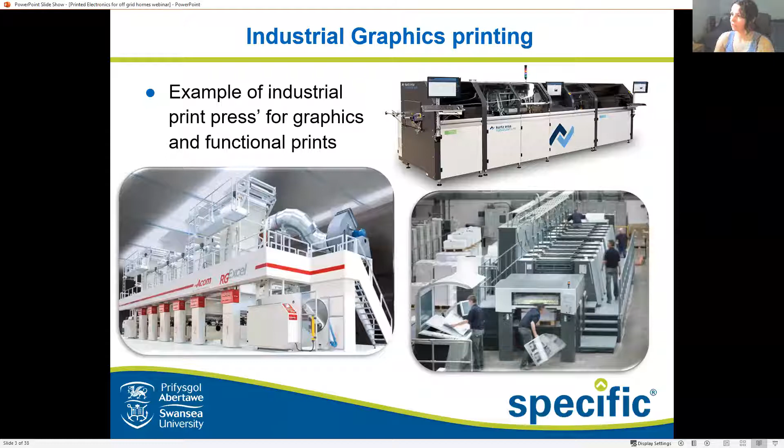What gets me excited is taking these capabilities to mass manufacture things at a very high rate onto flexible substrates and enabling it to have more complex properties. This is made possible because an ink is made up of four main components. This is the resin, which will combine with your solvent, whether it be alcohol-based, water-based, whatever it is. And then if you have a few additives together and you mix this with either your pigments or your other materials, you create an ink.

If you want a functional ink, you can add things such as conductive materials like silver, copper, carbon, or if you want it to change colors, you can add other things. This enables us to create a wide range of functional materials. And these come in a very wide range of viscosity. When I refer to viscosity, I'm talking about the thickness of the fluid, so how hard it is to shear.

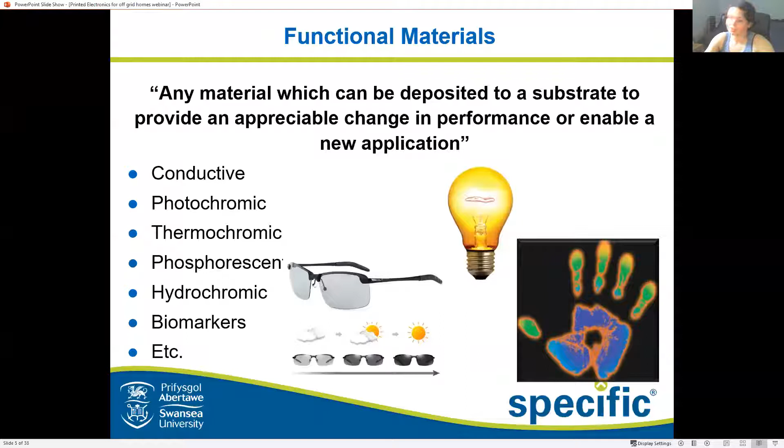So functional materials. Not only is there conductive, which I mentioned earlier, we've also got things like photochromics, which change color in light, thermochromics, which change color with heat, phosphorescence to glow in the dark, hydrochromics, which you might want on some waterproof clothing or on a waterproof screen in your car, biomarkers, which are essential for biosensors, especially ones like diabetes tests, which are actually printed, and many other things.

So this is where you guys who are listening live can get involved. We have a series of different images on the screen. Can anybody tell me which of these can be printed? If you can unmute yourself, please do, and just quickly shout out what can be printed out of this lot. Printed circuit boards. Yes, those can be printed. What else? Custom prosthetics. Yes, perfect. Those are most certainly printed. Anyone else want to hazard a guess? One more. Anyone? No, that's more than fine.

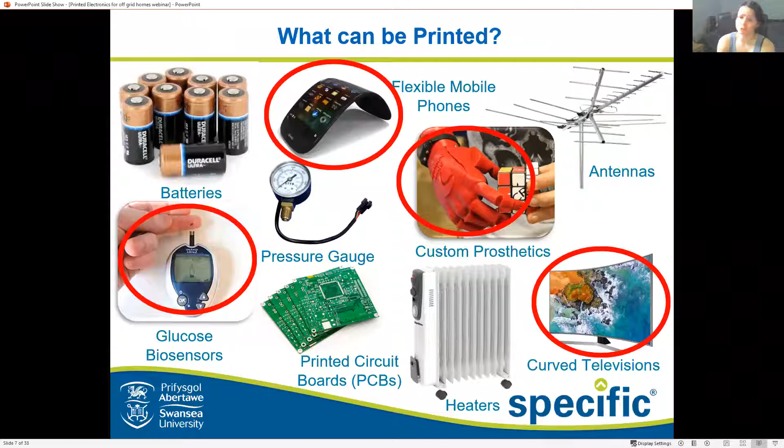Okay. So straight off the top, these four things can be printed exactly how they are. Glucose monitoring biosensors, those are actually screen printed, which we'll go over later. Flexible mobile phones, these are made of OLEDs. These are most certainly printed. Custom prosthetics, those can be printed using 3D printing techniques. And also curved televisions, those are also OLED. However, it was a trick question. All of them can be printed.

In the case of batteries, those can also be screen printed to make them flexible, thin, and easier to use. Those are currently being developed. Antennas can also be printed, such as radio frequency ID tags, which if you have some clothing from places like Decathlon, if you have a look at your tag, you will be able to see that they have that embedded in them. And therefore, they can be printed.

Heaters, this one might have been given away earlier when I was chatting to you guys. Those can also be printed, and I will show you a demonstration of one later. And pressure sensors, those can also be printed. So all of these things have the ability to be printed, mass manufactured, and made thin and flexible where needed.

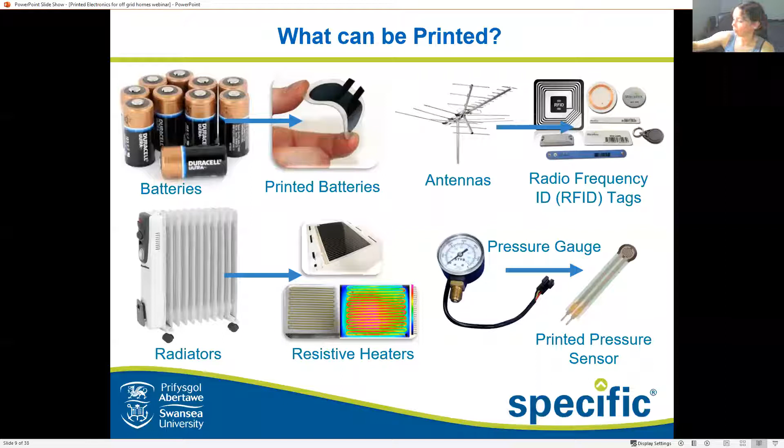However, all of these things can't be done on a single press, so there are a variety of printing presses available. These include flexography, which for anyone who's used stamps or done potato printing when they were younger, it's basically that principle. The ink transfers from the feed to this anilox roll, which is a roll with lots of tiny little holes in it, which have been engraved. These transfer to a 3D plate, which is like a stamp except on a roller, which will then transfer the ink onto the substrate.

Another one is aerosol. So some of you guys may have used aerosol cans to do spray painting. This is a far more complex version of that, which can be used to print very fine, very conductive features. Inkjet. So obviously a lot of you will know inkjet. That is something you may have currently sitting in your house and printing off your homework, but it is also used in mass manufacture of a variety of things, including magazines.

Gravure. So gravure is one of the more expensive of the presses. So this one, like your anilox roll here, is covered in lots of tiny little holes, but these perfectly represent the image which is being printed and enable them to transfer directly onto the substrate. So these are used in things like glossy magazines, which provide a really nice high quality image. So if you have things like National Geographic, that's probably done using gravure.

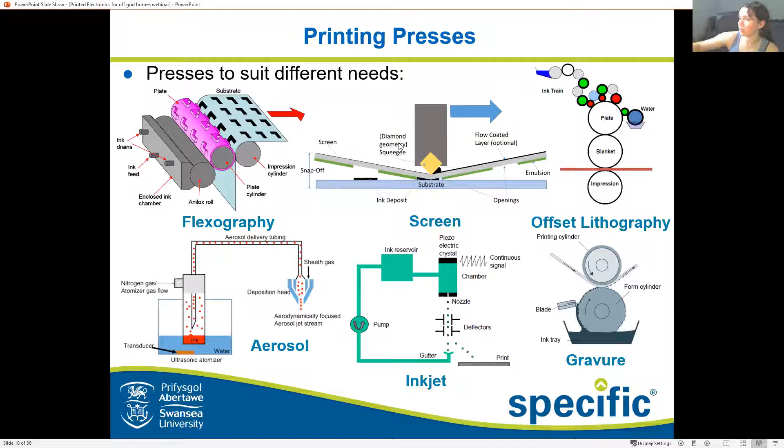So what is screen printing? Screen printing is a flexible process used for a wide variety of industries. It is actually used to produce the majority of printed electronics today, over 90%, as it produces most of the glucose biosensors, other biosensors, things like heaters, and it's also being used in solar cells, as we'll go over later. It is an industrial high-tech process. It's been used a lot in the graphics, and now it's being used to print electronics as well.

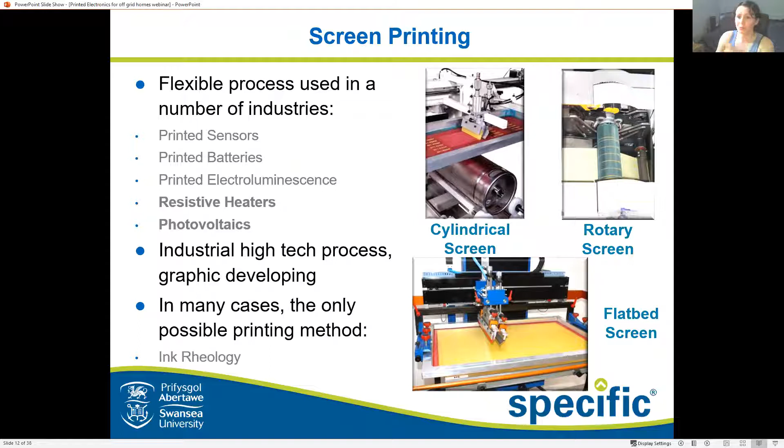And in some cases, it is the only process available to print some of these inks, as inks containing very large particles, such as big chunks of carbon, are very viscous because they have the big particles interacting with each other. They're actually really hard to stir, and they are very, very viscous. And this means that it requires a press which is capable of printing something that thick, and screen printing is the answer. So how does this work?

So you have a little diagram here. And if I stop sharing for a sec, I can give you a basic demonstration before I show you the other clips. So here is my screen. I will explain in a little bit what it is made up of. And if I tilt the camera down, you'll be able to see that if we were to have a substrate, such as one of my coasters, go in the middle, we're able to then prop our screen above at a set gap.

And then you will have a squeegee, which I'll describe a bit more in a sec, which will force your ink, which you can place here, down and onto your substrate as you force it down and go across. But more on that later. So if we go back to our presentation.

Sorry about this, guys. A few technical difficulties. And there we go. So sharing the screen again.

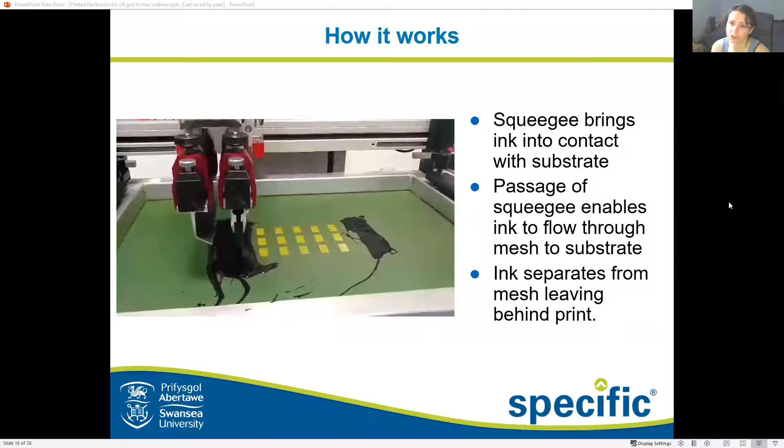So what I'm about to show you is some printing I did a few weeks back. So what I'm doing here is printing a carbon pattern, which is used in perovskite solar cells, which I'll talk a little bit more about later.

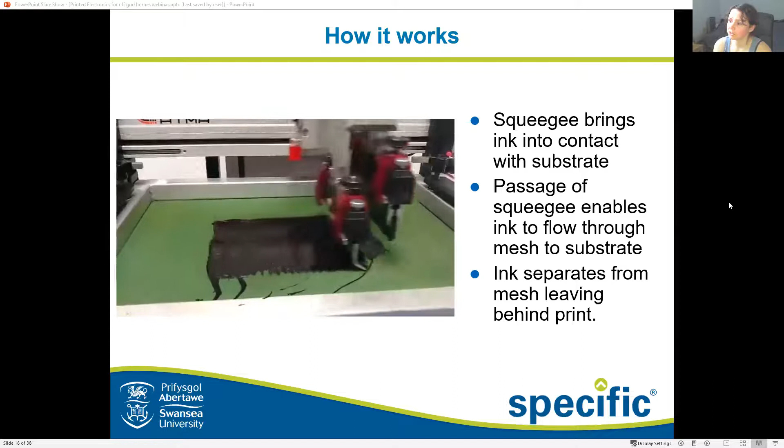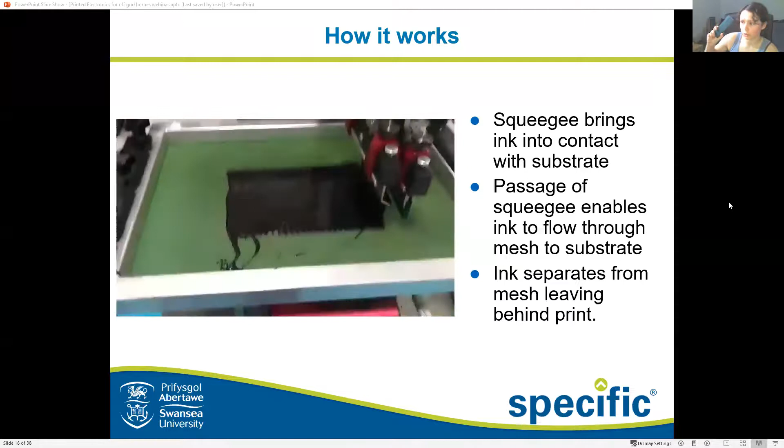So as I briefly described then, what you have is the ink getting placed onto the screen, evenly distributed across with a blade known as a flow coater, and then the polyurethane squeegee, which I have here in my hand, is being used there to force the screen to come into contact with the substrate and enable the ink to pass through in the exact pattern that you want it to be in.

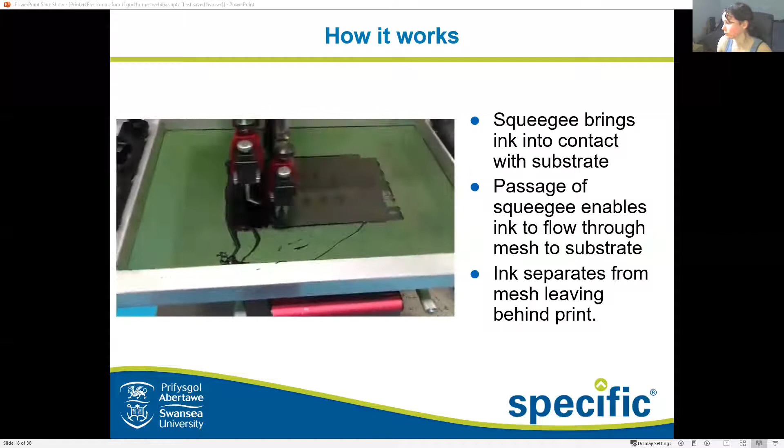So the issue with screen printing, which I found out, is that it has a lot of parameters. So you have your squeegee, which can come in a variety of types, hardnesses. You have your screens, all of which have different hole sizes. So the size of the hole will determine how much ink flows through, the thickness of the ink that can flow through, and the pattern type. All of these things can change.

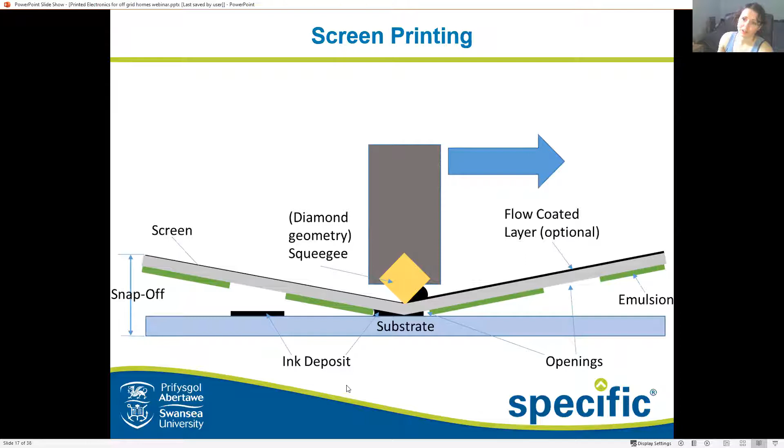The ink type, it can be a variety of viscosity, so a variety of thicknesses. So some of them will be very thin and run like water, whereas others will be thick and a bit like a really, really thick honey. So it can be just about anything. This gap between the substrate and your screen, that will also change. All of these things are a pain in the butt, but you don't have to worry about that. That's my job. So going over the screen.

So the screen I just showed you is made up of a stencil, which is on top of a polyester woven mesh or stainless steel, but I can't afford one of those, so I'm just showing you the polyester one today. It is very finely woven, a bit like a blanket.

And then to determine what can and cannot pass through this mesh, you have an emulsion-based stencil on top, which is then cured, dried, and then the rest washed off as shown in the diagram here. And altogether, this enables us to only deposit the exact pattern we want.

But some of you may think, how is this different from me getting a laser cut stencil and just coating it on? The reason being is you try doing some letters, preferably like an O, which are unconnected. It's very hard. This enables you to have far more control. It enables you to do complex patterns, and the woven mesh means it all stays in contact together, and you get the exact thickness of the ink deposited you want.

So there's a lot of things you can change to control exactly how it goes down, which makes it a really cool process, in my opinion. And the other thing, my favorite thing actually, is the squeegee. So what I have here are two squeegees in my hand, which are demonstrated on the screen as well. These are blade squeegees, as demonstrated.

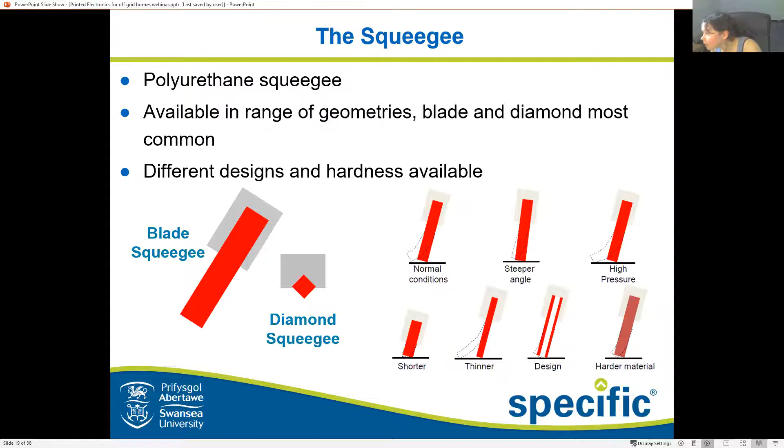So there are lots of designs to choose from, all of which have an impact on the quality of your print, and all chosen according to what you want to make. But rather than going deep into the science of screen printing, which if you want to know more about, please let me know at the end. I can talk to you for hours about it, but rather than bore the majority of you, I'll give you a few examples of what can be made.

So a big one at the moment is active and intelligent packaging. So these use things like thermochromic paints to tell us how cold something is. So if you want a nice cold drink, which might be quite nice in the garden right now, it will change color at a certain temperature to tell you if it's cool enough.

You can also get hydrochromic paints to indicate humidity, which is quite good if you want to check the freshness of some foods. And you also have electroluminescence displays, which make really pretty fancy light shows for your packaging. So all of these things are actually really useful.

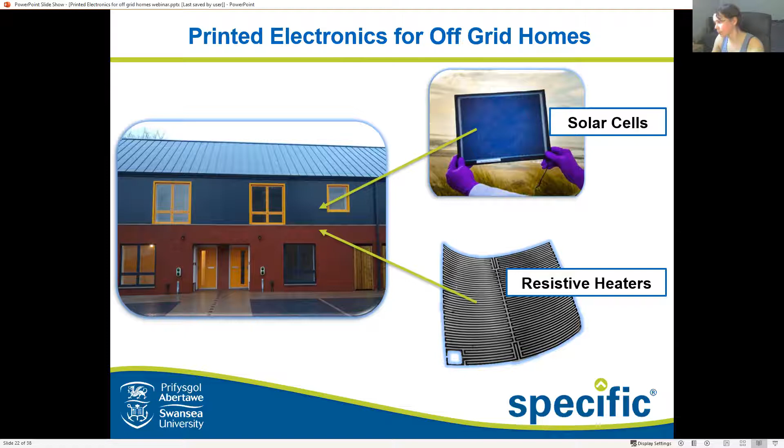So if we go a little bit more into detail, what are perovskite solar cells, for those of you who don't know? Perovskite is a relatively new version of solar cells, which have better efficiency in our delightful British weather. Yes, we're not sarcastic, but it's more efficient in lower light levels. It's not perfectly stable yet, but my job is to try and scale them up and get them into manufacture, and they can be really useful to us as we are all looking to try and decarbonize at the moment.

So how are these things made? Three of the layers, and an extra layer if you want it thicker, are screen printed. These include your titania layer, your zirconia layer, and my favorite one, the carbon layer on top. And all of these things together enable us to produce a very thin and potentially flexible, if you print it onto the right stuff, solar cell, with research being done into how to make them transparent as well.

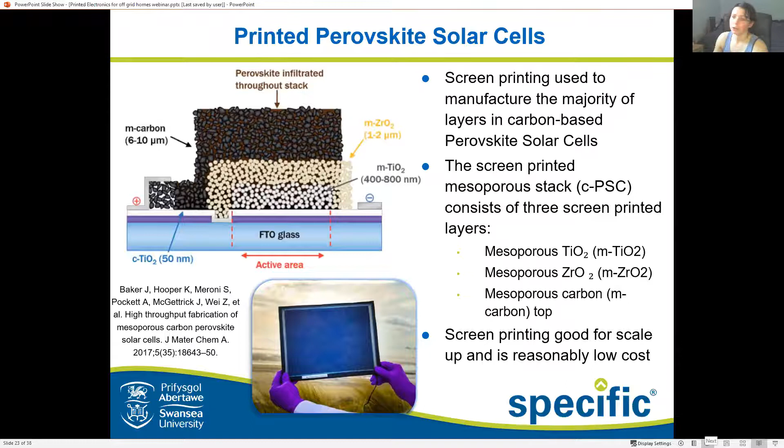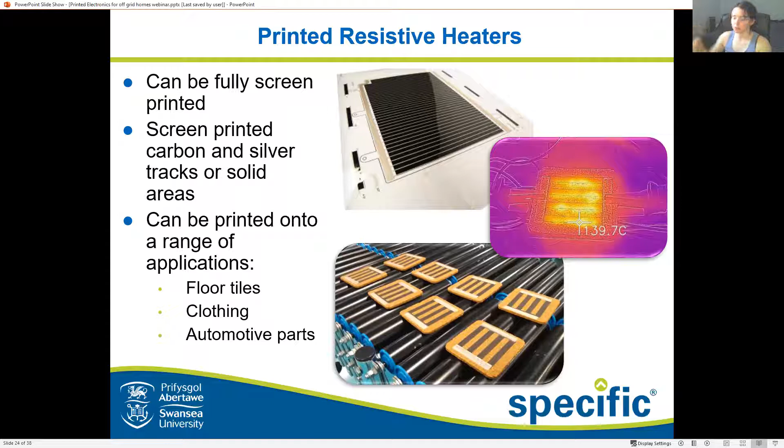And unlike typical cabling, which you might have for heating, these can be used to produce different areas. So you can have the pattern designed so it heats up exactly where you want it, and you have the full area heating you rather than just a single line of wire. And they have a lot more applications. But today I'm going to tell you, if you wanted to do this yourself, how you would make your own heat up coaster. And I'm going to take you through the entire process that I do to make these things.

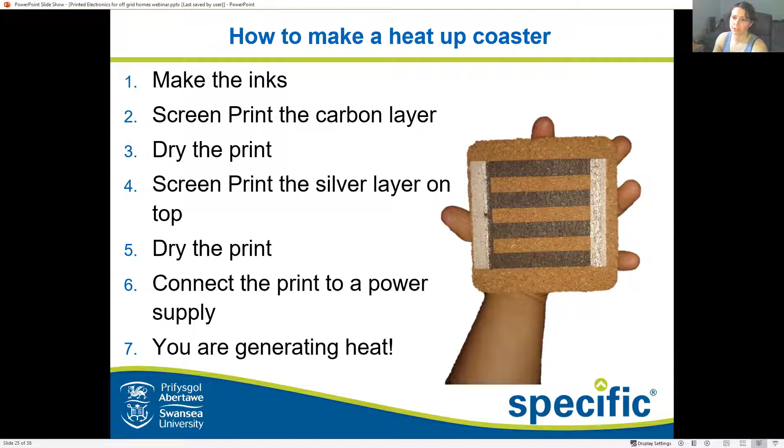So this will start with how inks are made. You can also buy inks, but I'll explain to you how they are made from scratch. How you screen print the carbon layer, and then how you do the silver layer, each step, then how you connect this to a power supply, and then hopefully we'll be generating heat, and I'll be showing you that live as my little demo.

So first things first, how do we make the ink? What you need to do is take your polymer granules, so your resin, and combine that with your solvent, whether it's water or alcohol based. What I usually do is put it in a big flask, combine them all together, and put them on a nice hot plate. This particular one needs to be heated to 70 degrees. Then we have a big overhead stirrer with a blade at the bottom going round and round for around an hour until it's all nicely dissolved into the solvent, creating a nice resin base.

After that, to make our ink, we can then add our functional materials or our color granules or whatever it is you want as your main particle. In this case, it would either be silver or carbon, but normally the ones I get are usually agglomerating, so all sticking together, which would make a really horrible clumpy ink, and that's not very good when you want a good performance. So these would then be milled. In this case, it would go through a triple roll mill to make these particles finer and more evenly distributed in the ink.

So you can see one of my examples here of my rather grainy carbon ink going through these rollers and coming out at the end. Admittedly, it doesn't look that great coming out, which is why it then needs a final stir to improve its consistency, and voila, you have ink.

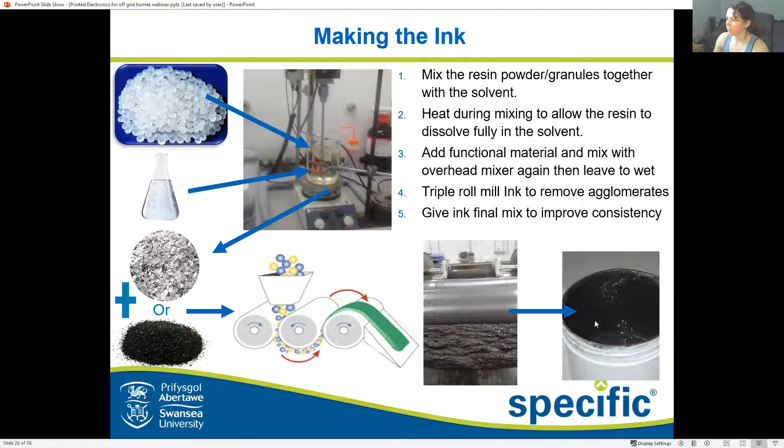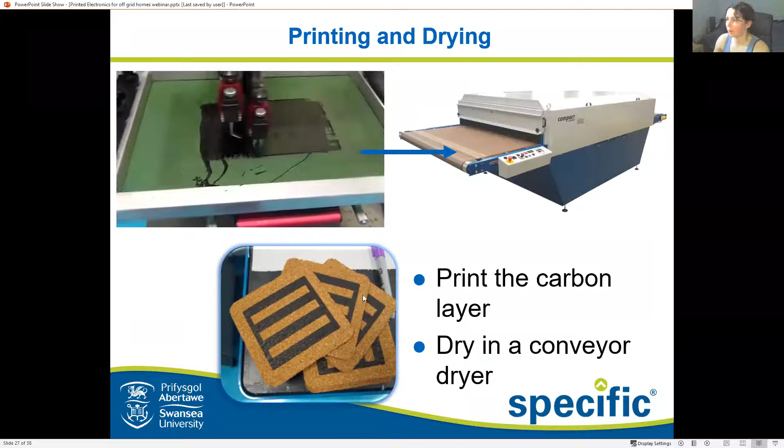So what do we do next? The next thing we do is we slap that ink onto our screen, and then we print it with whatever settings and whatever pattern we need, and that then goes through the dryer. And this is what my coasters look like after only the carbon layer was printed. The next thing we do then is we once again get the printer out and get the silver ink, print that, and then that goes through our big conveyor dryer at whatever temperature is needed to remove all of the solvent.

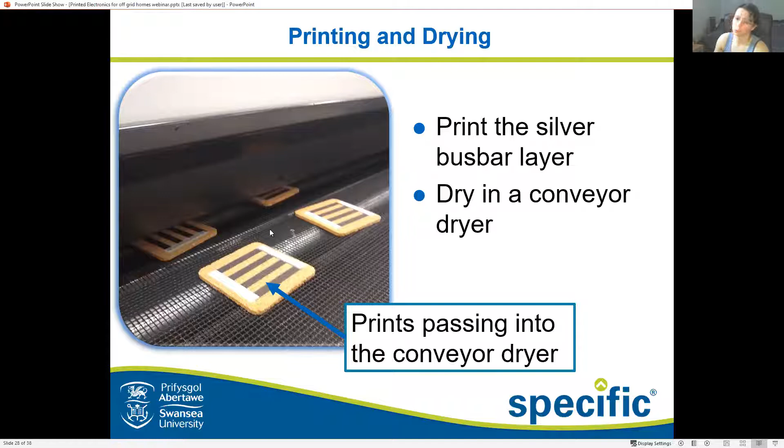And if you are fully curing it, you can also put it at higher temperatures to get rid of the binder, but I'm quite happy to have the binder in for this particular use. It works fine for these coasters. And then after that, you have your coaster.

So these are some I've made recently just to test out cork, because cork's actually a really cool material. It's thermally stable to over 200 degrees, which means even when I put it through the oven, it doesn't come out as a smoldering lump of charcoal, which is really useful when you want to try it for floors.

So this is what happens when you wire it up to a variable voltage power supply and you set your current and voltage. When it runs through, this is what you'll see on an infrared camera, which I will also be demonstrating today. At around 20 volts and 0.7 amps, we are getting a temperature of around 45 degrees.

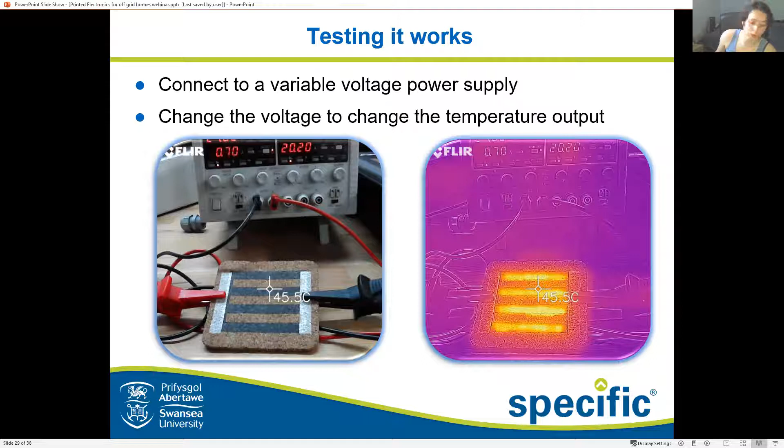However, if you put it up to around 27 volts, so you increase that voltage, I've actually got it as high as 139, but I don't want to go that high today because I'll burn my hands. So the demonstration I'm about to do is with two 9-volt batteries put in series for around 18 volts, and then we'll measure the temperature output using my infrared camera.

So to show you that, I'll stop sharing my screen and show you the demo.

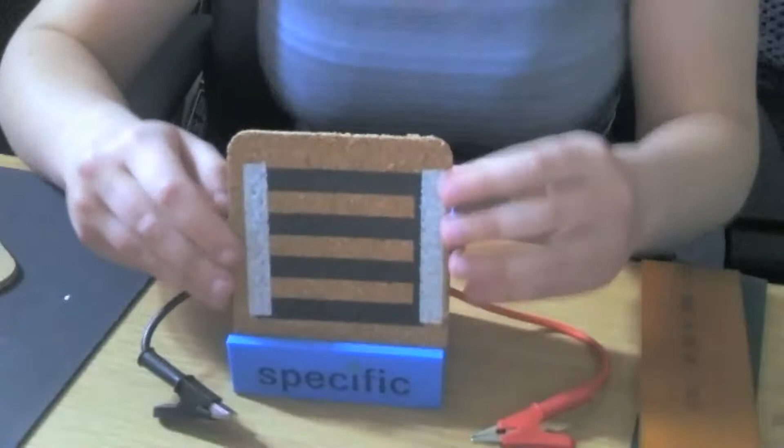So if I drop this down and show you, here is the coaster, which is plugged into a pair of 9-volt batteries, connected to a switch so that it's not always on. If I put my coaster back in place and plug it in with the negative side and positive side, we can then run through it.

And if I turn on my infrared camera, so what we've got today is a little FLIR one. This is a small infrared camera that can be used with a mobile phone device. If I plug it in and get it going, I apologize, sometimes it takes a little while to warm up.

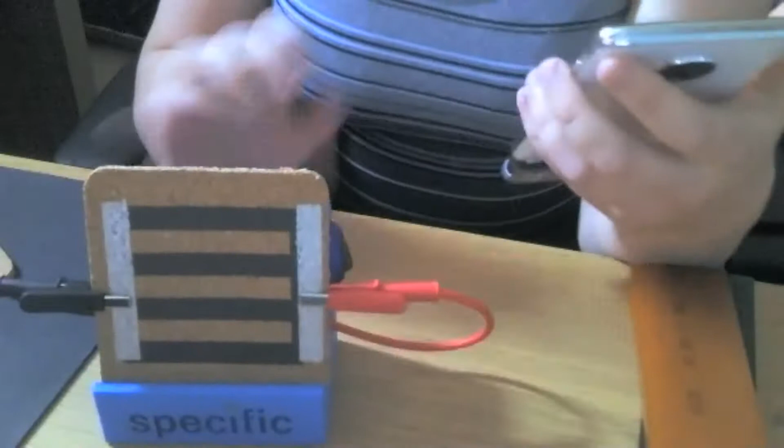There we go. So whilst that is warming up, what you have here is the exact coaster you saw going through the process earlier. So this is our layer of carbon and this is our layer of silver. This is actually being printed around 8 times to overcome the roughness of the coaster, so that's another thing you also have to do.

So if I get that around about in place, try and align it with the camera. Can I see my tiny cold fingers? Roundabout—yes, you can see my very cold fingers, which means that we are in the right place. So if I turn this on and try and get that in place, you can now see it's starting to heat up.

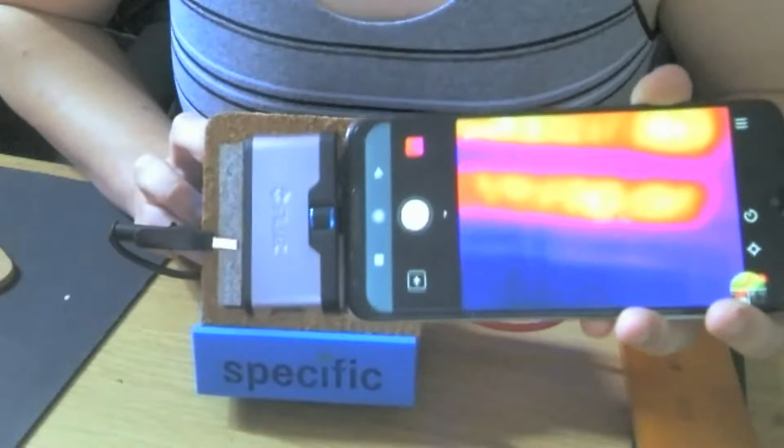But as well as this one, we can also have ones which you can paint at home. So this was actually done at home using a carbon-based ink, which I bought online, and I painted this. I wouldn't recommend painting—it is a little bit tedious, I'll be honest—but you can also, if I plug that in, get it to try and heat up. Now this ink, admittedly, is nowhere near as conductive as the other one, which means that we may struggle to get it to heat up.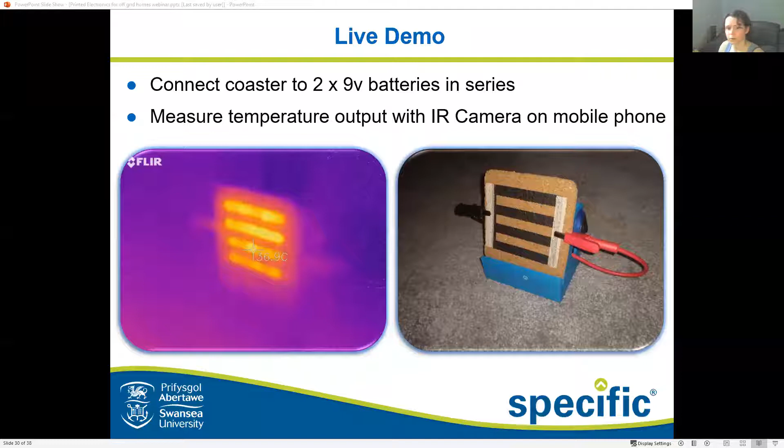Going back to the presentation—how do we know that this is good enough? Is it on loud? Sorry, who is that who's talking? I can try and mute you if you're struggling, but I thought I had muted everyone. Okay, phantom, fair enough, we have ghosts.

But what we can do is check for print consistency. We can do this using a few things. A good print quality is normally nice and continuous without lots of holes in it and areas where it can short. So you want a good print quality, and that will give us good electrical performance. We can check this by print roughness and also the film thickness. When I talk about roughness, we're talking about the large roughness of the wavelengths as well as the small indentations. We can also look at film thickness.

We can also do electrical characterization. In this case, you can use a multimeter or a source meter to check that, as well as looking at the microstructure to understand what our carbon flakes are actually doing. So let's go through that.

For roughness, we can use topographical measurements. When I say that, I mean the form of your print. Something I use quite often is called white light interferometry.

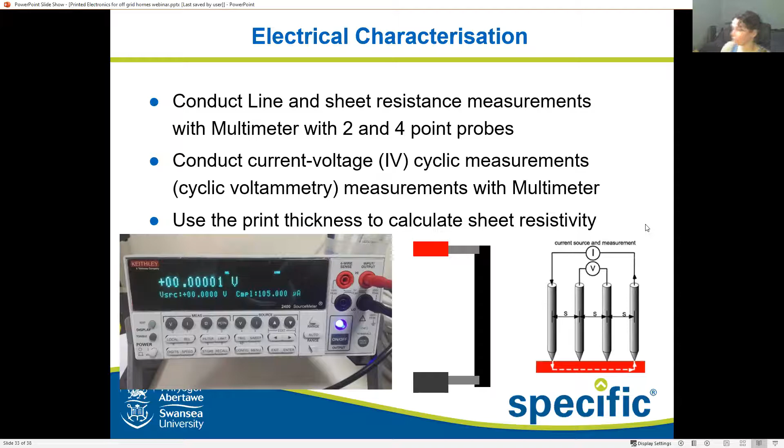Another thing I particularly enjoy doing is very close-up microscopy, using scanning electron microscopy to look at things in the micro and nano region. It uses an electron beam focused by a condenser lens, which passes through a series of coils and plates that deflect the beam in the X and Y axis so it scans over an area of the sample surface.

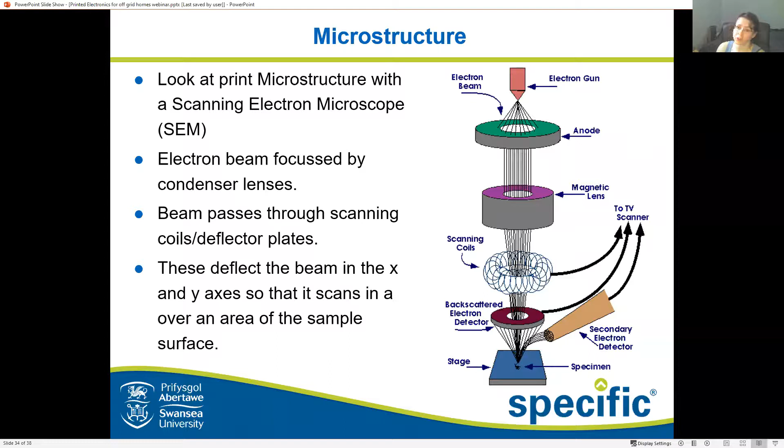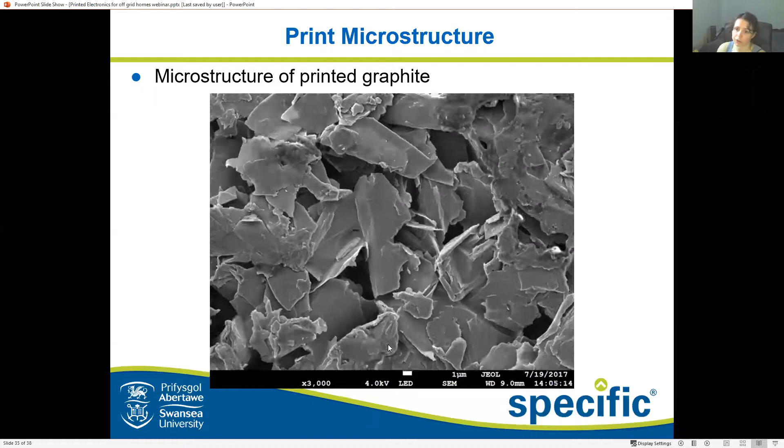And now you also know, if you get bored, how you can make a resistive heater just out of a bit of carbon ink, which you can buy online.